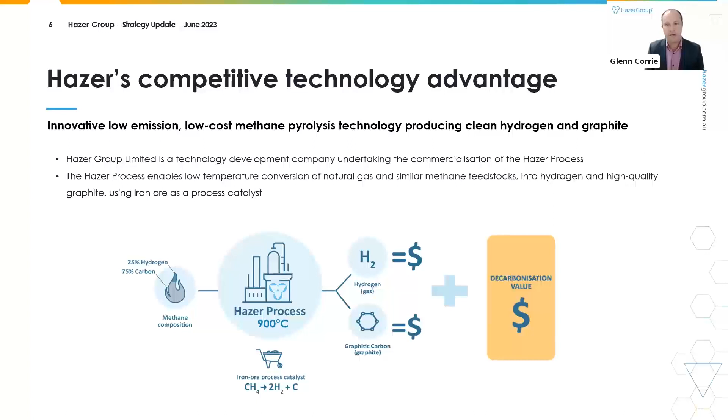Just to recap, Hazer is developing a low-cost, low-emissions methane pyrolysis technology that essentially takes natural gas and methane as a feedstock, which is 25 times more harmful than carbon dioxide. Using iron ore as a catalyst, we split it into pure and clean hydrogen and solid carbon in the form of graphite. The iron ore, which is cheap and abundant, is our competitive advantage for two reasons. Firstly, it significantly reduces the energy requirement of our process, resulting in much lower operating temperatures. Secondly, it enables the production of very high quality graphite. So we are essentially one technology that serves three very valuable markets: the hydrogen market, the graphite market, and the decarbonisation market. And it's the latter that is attracting quite significant attention and interest in our technology.

Corporately, our largest shareholder is AP Ventures. They are a leading global hydrogen investment growth capital fund, backed by some very sophisticated and notable investors, including Mitsubishi, Sumitomo, Equinor, Anglo American, as well as the Temasek Group in Singapore. It's very strong validation for us, our story and our technology, that we have a substantial holder from a very sophisticated investor. Other things to point out: we have an adjusted cash position of just shy of $18 million following the receipt of our R&D rebate cash refund, which significantly shores up our liquidity. It's worth mentioning as well that we have spent $70 million to date on developing the technology, which really just represents the scale of the investment we have made in developing and advancing the Hazer process.

We'd like to share a short video with you that highlights, we think, a very nice summary of our technology.

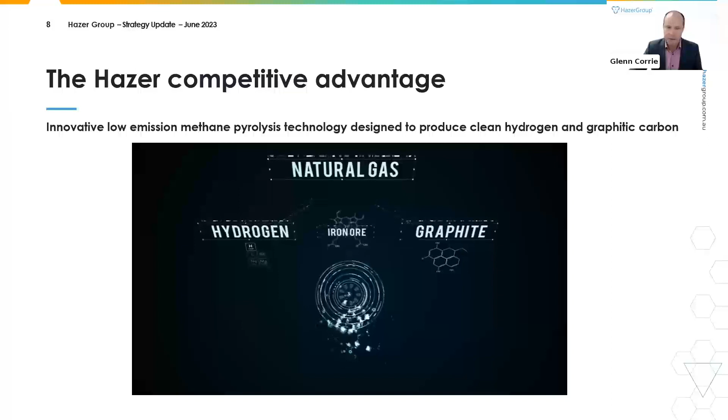Hazer, a low-emission, low-cost hydrogen and graphite production process. The Hazer process enables the effective conversion of natural gas into hydrogen and high-quality graphite using iron ore as a process catalyst. Welcome to the Hazer pilot plant, transforming today's commodities into clean energy and materials for tomorrow.

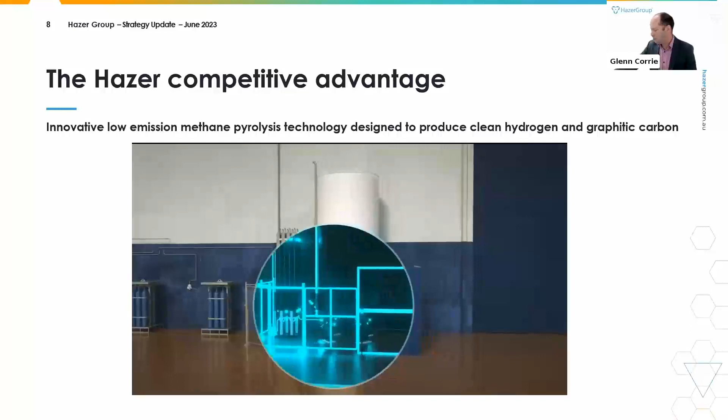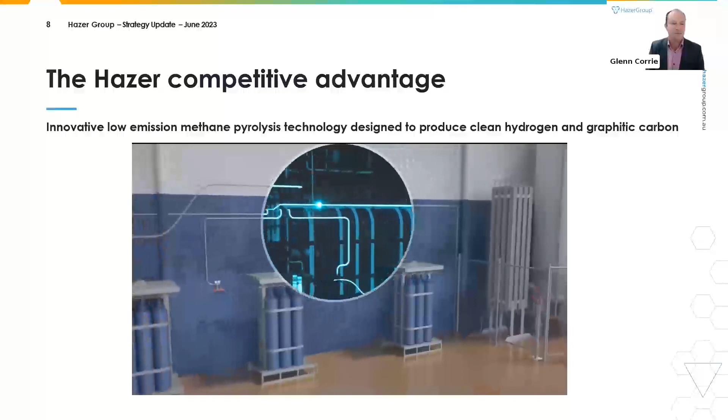The Hazer pilot plant uses natural gas as its primary feedstock. The gas is stored as LNG, which is regasified and fed through the main gas manifold before being taken to the reactor to commence the Hazer process.

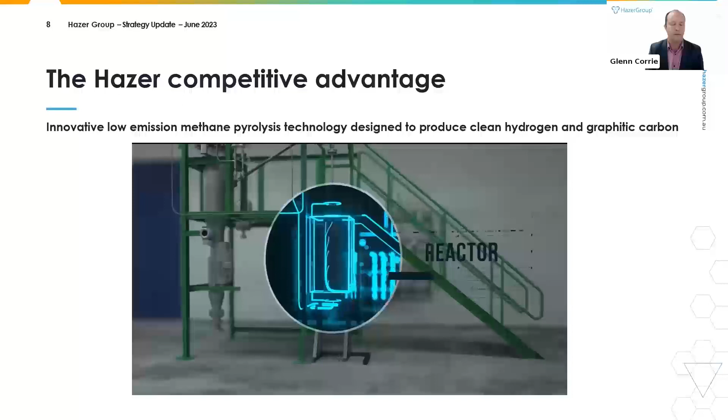The Hazer plant is based on a reactor called the fluidized bed reactor, where solids and gases can freely mix to enable the efficient conversion of natural gas into hydrogen and graphite. The reactor is heated to approximately 900 degrees Celsius.

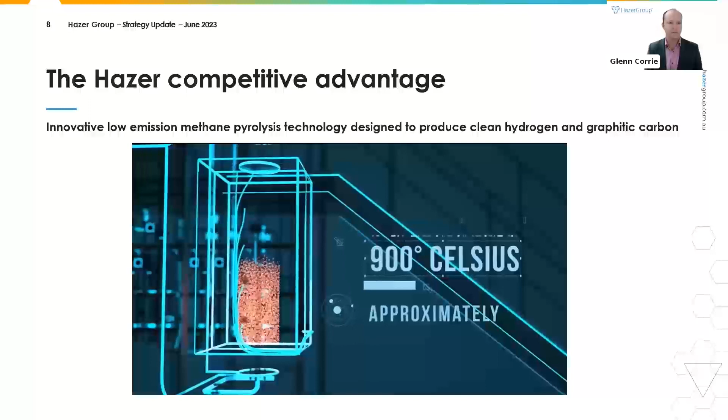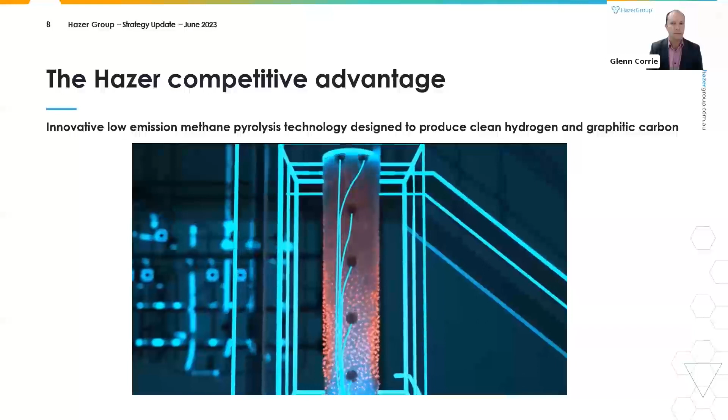The gas is forced through a distributor plate within the reactor. The velocity suspends the iron ore catalyst particles in the flow of gas. The catalyst is fluidized, suspended in the gas, and mixing the solid sand-like particles with the natural gas.

In this process, the methane molecules in the natural gas interact with the surface of the catalyst, decomposing into hydrogen and graphite. Under these conditions, the catalyst disintegrates into nanofragments, a process known as dusting.

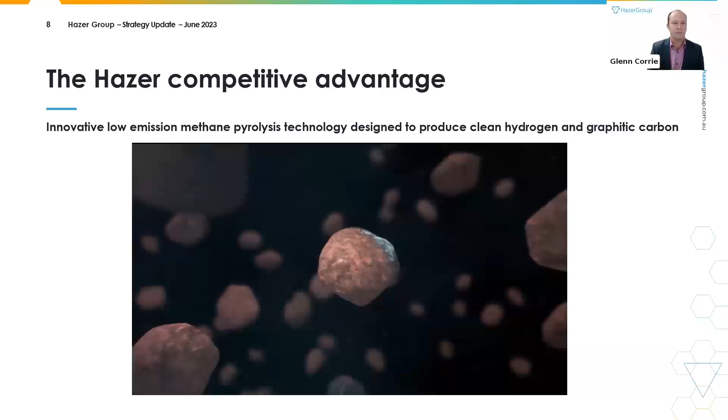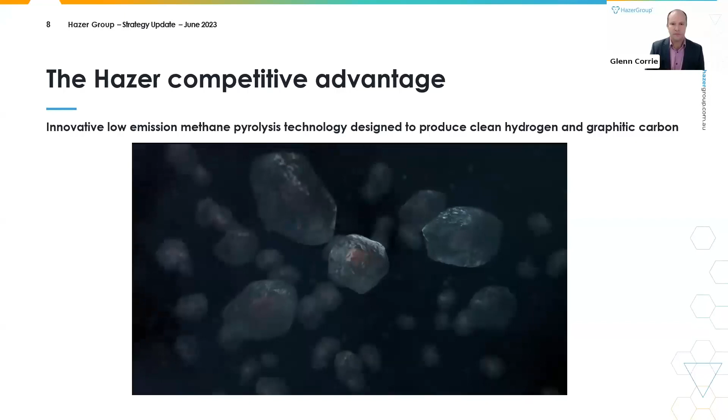The graphite is deposited on the surface of these tiny catalyst particles, while the hydrogen is released and mixes with the original natural gas feed. The graphite accumulates on the surface of the catalyst particle, reducing its density, which allows it to be liberated from the catalyst bed via the passing gas stream.

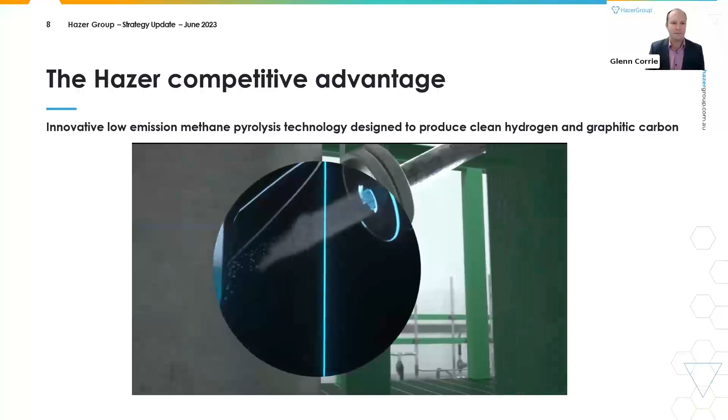The reactor expels a combination of gases, unreacted natural gas, and the hydrogen product, as well as the solid graphite particles. This stream is filtered with sintered metal plates, yielding high purity graphite with minor amounts of encapsulated catalyst.

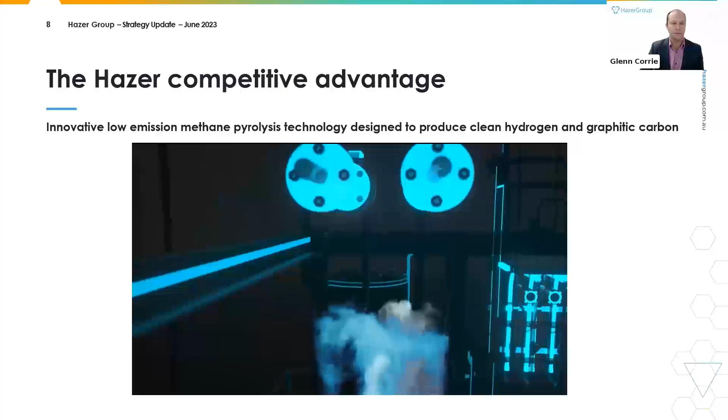After removing the solid graphite, the gas from the reactor can then be purified to remove the methane and any other byproducts, leaving pure hydrogen that can be used as an industrial chemical for clean energy applications, as a fuel for vehicles, or for power generation.

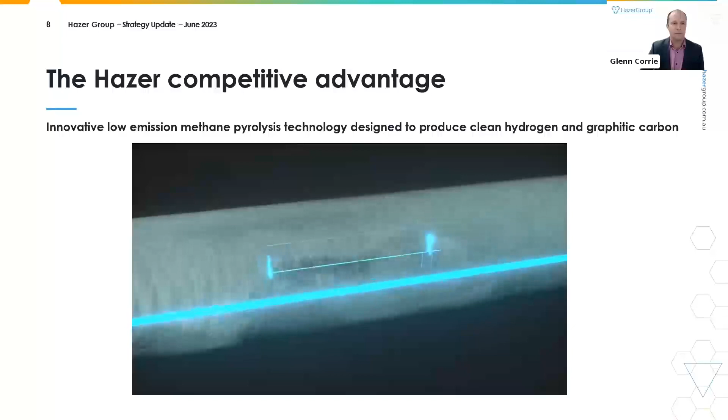The Hazer process has now created two new products: a raw 80 to 95% purity graphite product, and hydrogen. The gas has been transformed.

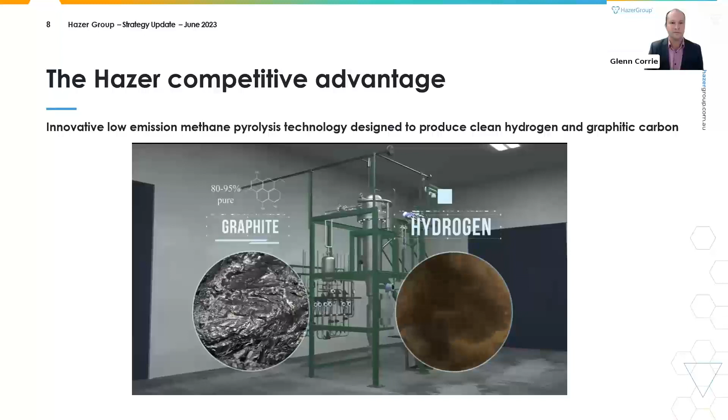In terms of strategy, we have spent the last 6 to 9 months developing what we think is a very robust strategy for the Hazer Group, really highlighting where we are today in terms of commercializing our business. I've often referred to Hazer as a double bottom line company, aiming to deliver sustainable financial returns for investors whilst having a very positive impact on climate change.

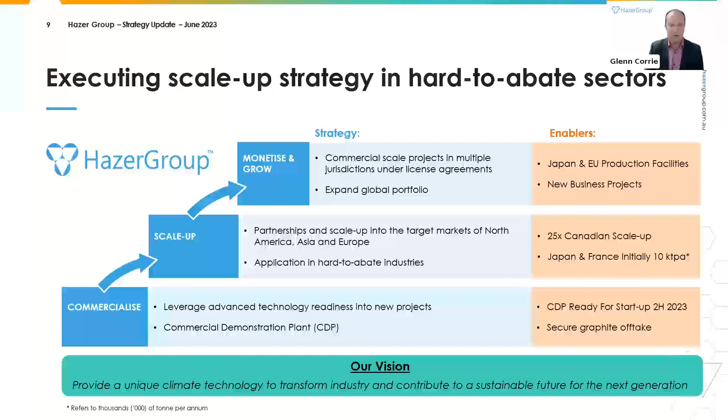We have 3 strategic pillars to our company. Firstly, commercialize, which is about leveraging our advanced technology and our CDP into new projects. Scale up, which is all about building partnerships with scale into our target markets, namely North America, Asia, and Europe. And thirdly, monetize and grow, which is about taking our commercial scale projects and developing a global portfolio under license agreements. Today's presentation from us is framed around these 3 pillars of our strategy.

It's just worth acknowledging very quickly, we align with the United Nations Sustainable Development Goals. The 3 most relevant SDGs to us are SDG 7, providing affordable and clean energy, SDG 9, industry, innovation and infrastructure, and importantly, SDG 13, climate action, where we are partnering with global corporations and governments in support of climate action.

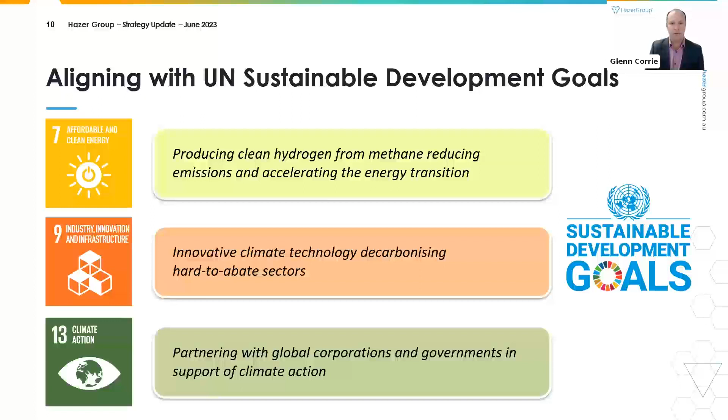Last one in this section, we have a very busy 12 to 18 months ahead. We've got a long list of positive milestones and catalysts. Today, again, we're reiterating our guidance that our CDP, our commercial demonstration plant, remains on track for a second half of this year startup.

We're making continued good progress on the procurement of the heat exchanger and the reactor materials, which Mark will talk to shortly. Secondly, we continue to drive forward our project in Canada with Suncor and Fortis, energy giants in North America. All of the engineering work around the reactor and the balance of plant is ongoing, and we are now working on definitive commercial agreements, which includes the license arrangements as well as offtake agreements for the hydrogen and the graphite streams. We're still targeting a final investment decision on that project by the end of this year.

New project-wise, you'll have seen we're very pleased to have announced 2 new projects this year, one in Japan and one in Europe with Engie, leading partners. These transactions, again, just demonstrate that we're executing strategy.

As Luke will elaborate, our pipeline is deep. We continue to work in our target markets of Asia, Europe, as well as North America. We continue to work very closely with Mitsui on our graphite and the marketing of our graphitic carbon. This is going very well. We're starting to see very strong interest in Hazer graphite from sectors actually that we didn't really anticipate. We'll share a little bit more about that today.

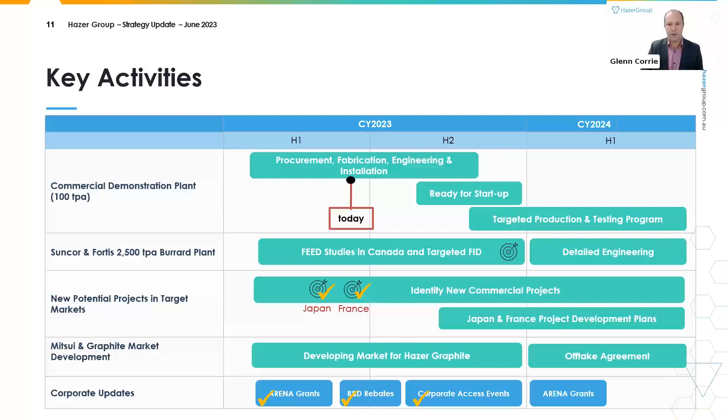Corporately, we continue to kick goals and get more runs on the board. We've achieved our ARENA milestone, accelerating $3 million of cash into the business, and we recently announced the receipt of $9.5 million in R&D cash rebate, which further shores up our liquidity, maintaining our robust and flexible financing position.

Moving on to our investment highlights, we've got 8 key highlights. Our investment case is really compelling. We're a disruptive, low cost, low emissions proprietary technology with a very strong competitive advantage.

One technology that serves 3 markets. Attractive returns and economics—we're on the lower end of the cost curve, very importantly, which is going to drive higher margins and larger cash flow generation as we start operating.

We've got a rapidly expanding global footprint with tier 1 partners in our strategic markets, decarbonizing hard to abate sectors.

Fourthly, we're an advanced technology. We've successfully scaled this up now 5 times, and we're now preparing our commercial demonstration plant for first production this year. Number 5, we've got a clear commercial pathway.

We are CapEx light. What that means is we will enable early free cash flow as a licensor of our technology, eliminating the requirement for large licks of capital as we develop our technology and grow it into global locations.

Number 6, as I've mentioned on the graphite side, we're unlocking the value for our graphite, which diversifies our earnings over 2 products, hydrogen and graphite.

We've got the strong tailwinds of the energy transition, and we're right in the sweet spot. The market is large, as we'll demonstrate this morning. It's valuable, and it's growing at pace. We're also excited by the fact that we have strong government and policy support for hydrogen in a lot of our focus and target markets.

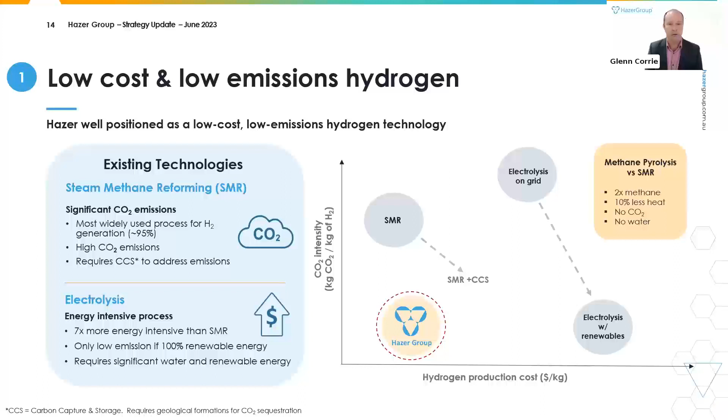We've got strong IP protection. We've been at this 15 years in terms of developing our technology and putting IP behind it and securing our patents. We have secured key patents in multiple jurisdictions around the world. We've got 4 IP families: focused on the iron ore catalyst, focused secondly on the morphology and purification of our graphite, improvements in our top technology around the reactor in particular, as well as our trademarks. Today we've secured over 70% of our IP, our intellectual property, in 30 jurisdictions around the world.

We continue to receive approvals for patents and grants continuously. Today, I'll say we've never been challenged on IP, and every application that we have made for a patent, we have received. Generally speaking, if we receive one in the US and in Europe, generally we find the rest of the world follows in that respect.

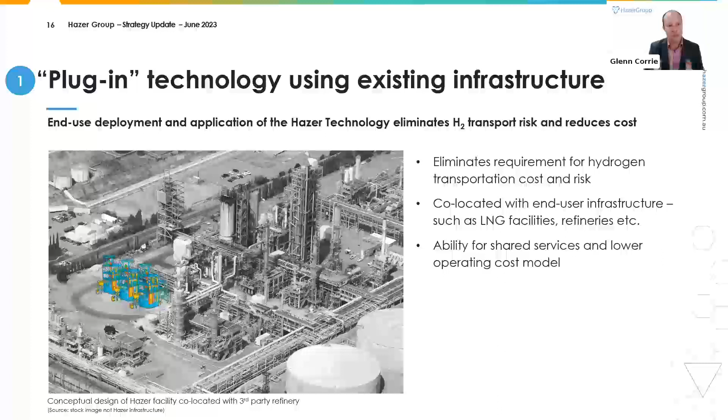Advantageously, Hazer is a plug-in technology, and this will come up as a theme throughout the presentation. We are co-located with and integrated with end user infrastructure, such as refineries, as you can see in the picture on the left, a petrochemical plant, and this eliminates the requirement for shipping ammonia or liquefied hydrogen, both of which are unavailable to deliver hydrogen today.

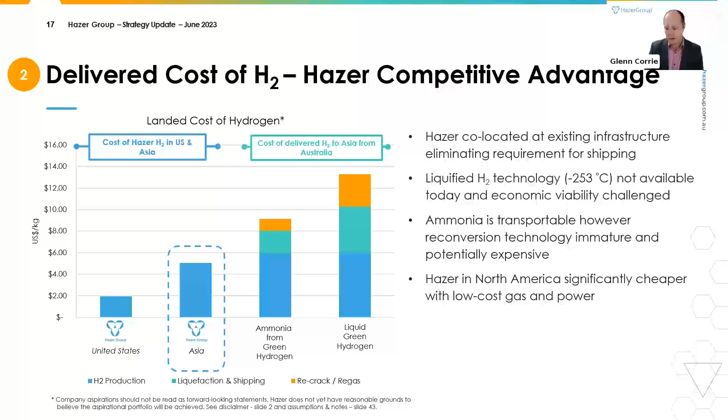We've already scaled this technology up 5 times, so we're very well advanced. Our technology readiness is quite high on the scale already. In fact, as we've scaled up, we've benefited from not just the larger scale, but also the economies of scale and getting access to equipment and materials. So the technology has actually enjoyed being larger for us to scale up. And our focus at the moment is clearly on delivering the commercial demonstration plant, and behind that, then delivering the key projects in Japan, in Europe, and in North America that we've got in the pipeline.

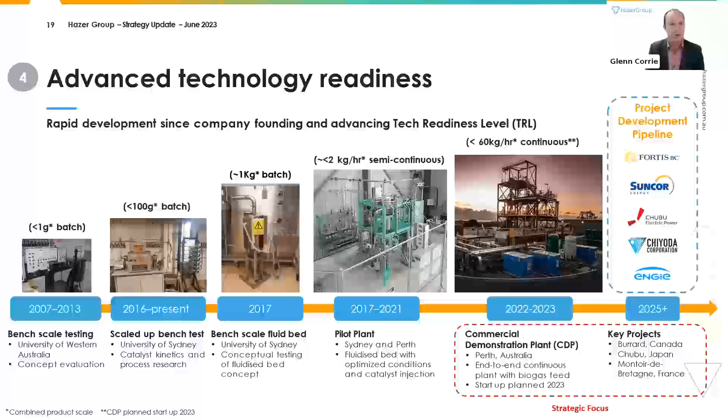We've got an active R&D program at the moment. It's the core of our business, and it's one of our competitive advantages. We've got 3 main areas that we're focusing on: the process development, essentially how we scale up this technology and how we scale up our reactor to 10,000 tons per annum, 20,000 tons, and even larger as our customers demand. Secondly, we're unlocking the value of our graphite. It's a very versatile product, and we're currently identifying suitable high-value, high-volume markets and other potential offtake opportunities. And thirdly, on catalyst, iron ore, as I've mentioned, is a competitive advantage. It's cheap, yes, it's abundant, and it also enables that low-cost, low-temperature reaction to occur. That drives our low-cost model.

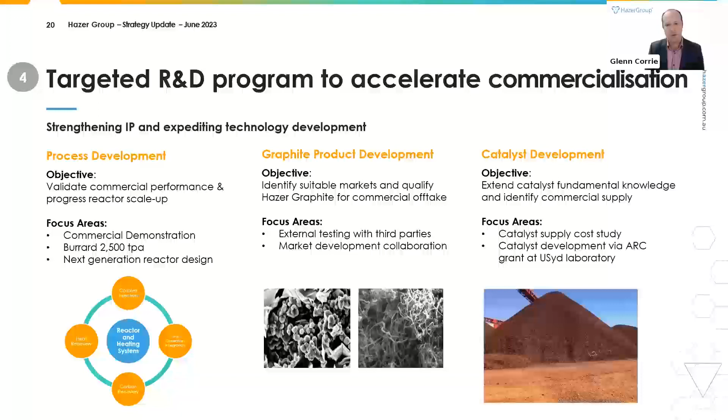How we source catalyst, process it, and transport it will continue to drive operating expenditure, and we see improvements to further drive this down. We've got a CapEx-light business model, very important. We leverage the strengths as a technology provider and licensor of the technology. This has the advantage of unlocking early free cash flow by avoiding large-scale capital exposure, enabling the delivery of cash flow from day one once we're operating. We'll achieve this through strong partnerships at the engineering level and the EPC level with groups such as Chiyoda, Suncor, Wood, Hatch, and others that are supporting our technology and our business.

We've developed a revenue model that consists of a combination of license fees and royalties. It's fairly common for technologies. License fees will be linked to plant size, and royalties will be a percentage of our revenue or revenue from product streams.

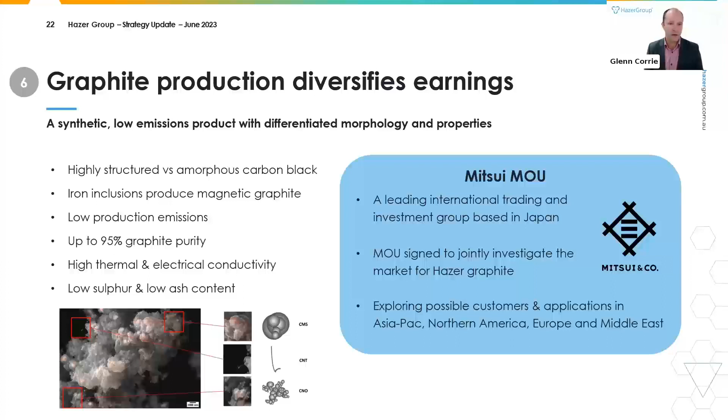As I've mentioned a few times already, our graphite is versatile, it's potentially very valuable, and has very unique properties. It's high quality, up to 95% purity. It's importantly low emissions, and that's very attractive to certain customers. Last year, you will have seen in December, we joined forces with Mitsui under an MOU to explore the markets for our Hazer graphite, and this really helps to support and validate the potential value of this product. The earlier results that we've seen from that work has been very encouraging. We're starting to see wide-ranging interest from potential customers across a broad-ranging and diverse range of applications: steelmaking, water purification, lithium-ion battery technology, thermal energy storage, asphalt, concrete, just to name a few.

In particular, we're getting quite strong interest from the steelmaking sector as a potential broad-ranging application for a replacement, as an example, a replacement of coking coal in the blast furnace, and also a recarburiser in the electric arc furnace. So there's some really emerging markets for the graphite.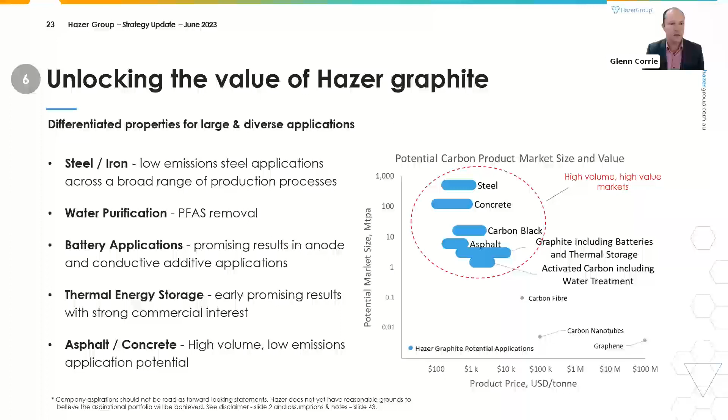If you look at the chart on the right, it will give you a little bit of context in terms of the potential TAM, or market size, for our graphite. It could be as large as over 700 million tons per annum in terms of size or scale of market, with price ranges exceeding over $1,000 a ton. So something we're obviously very keen to materialize over the coming months and years ahead.

Here's a snapshot of the hydrogen market. Climate change, of course, is a problem. Hydrogen will be a key pillar to the solution. We're confident of that - it's a question of how big it's going to be. Most research out there suggests it's going to be growing in the order of 5 times by 2050 with the rise of the hydrogen economy.

Goldman Sachs has estimated that it's going to take about $5 trillion of investment required in the supply chain to get to where it needs to be by 2050. Today's market on the left-hand side is almost 100 million tons per annum. To put that in context, the global LNG market is about 350 to 400 million tons. So this is already a quarter of the global LNG market. So it's large and it's very valuable. It's valued at around 170 to 175 billion dollars in 2022. So it's a significant market.

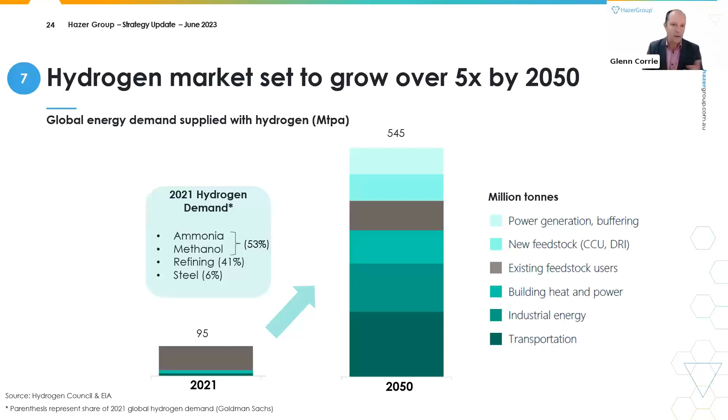All of that 95 to 100 million tons of hydrogen is produced by steam methane reforming, as I mentioned earlier. That gives rise to significant CO2 emissions, and that's Hazer's immediately addressable market today as a disruption to steam methane reforming as a technology. We'll see this grow into 2050. We expect to see significant growth in hard-to-abate industrial sectors. We're being approached by companies and corporations operating in these industries looking for decarbonisation solutions to steel making, cement making, power generation, and mobility.

In our markets, we are seeing a strengthening support on fiscal policy and financial support to hydrogen technology and clean hydrogen. We are witnessing a clear shift from ambition to policy action. Just to call out a few: in Australia, the Australian government has just announced the Hydrogen Head Start program, which has committed $2 billion to industry. In addition to that, we've been the beneficiary of an ARENA grant up to $9 million, as well as $9.5 million in terms of our R&D tax refund.

So great support here. In Canada, a little bit the same - we've received a grant for our Canadian project of $8 million to start with, which is great. And we expect further provincial and federal funding as we approach FID on that front. And I will also call out the US here.

The United States has the Inflation Reduction Act, which is recently announced. It's very attractive supply side support, offering up to a 10-year tax credit worth up to $3 a kilogram for hydrogen. Now, we may not need all of that as a low cost, low emissions supplier, but it is potentially available for us when we start operating in the US. The recent Australia-US Climate Compact, we think, will help facilitate access to this indirectly or even directly. So we're excited about the potential of the North American market.

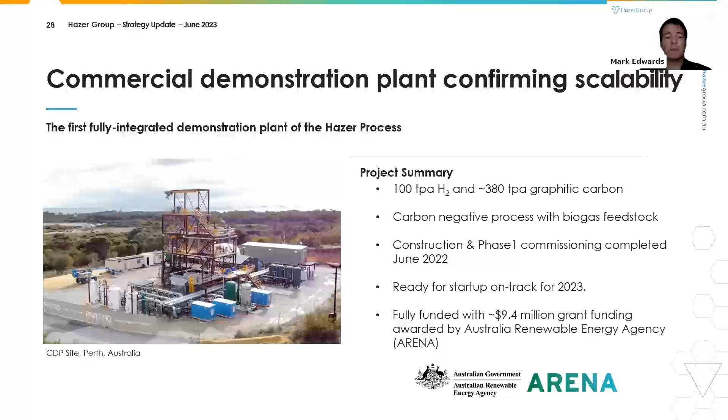The project takes waste biogas from the otherwise flared gas at Water Corporation's waste treatment plant and turns it into hydrogen and graphite. It's viewed as a very positive project, both in the local community and industry and government, demonstrated by government support, with ARENA awarding one of its largest grants of $9.4 million to support the project.

The current status of the CDP is we're in the final steps to bring it online. From the diagram, you can see there's only a small amount of equipment to install, most of which we already have on site. The remaining equipment we're waiting for is the 2 hot heat exchangers, for which we've already received all the specialist materials, and fabrication has commenced.

The last item is the Mark I reactor, which has already passed the critical milestone of materials forging and heat treatment. It's actually just in its final machining stages, and that's expected to be shipped to Australia in a couple of weeks, where we'll finish the fabrication and assembly.

We've started construction on site to get an early start on the furnace and the heat exchanger and supporting electrics. Once those last 3 remaining items arrive, we're confident to have all the plant and equipment installed by around the end of Q3. That gives us a comfortable amount of time to complete the commissioning process and achieve hot operations, RFSU, in the second half of this year.

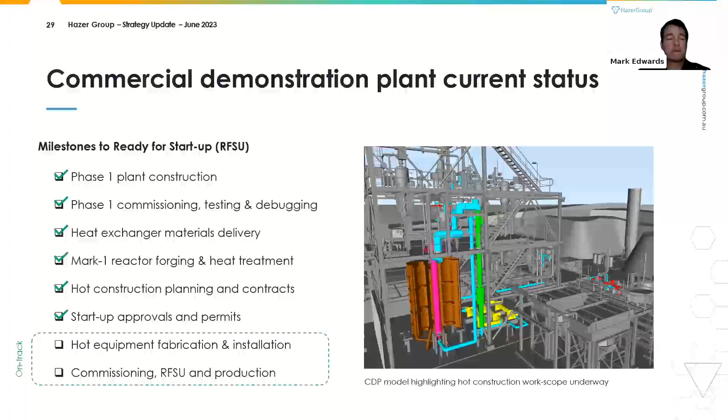Luc will now update us on the project pipeline.

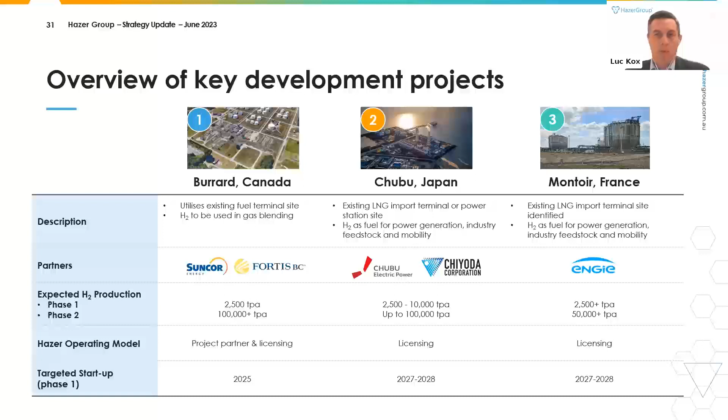In the next couple of slides, I'd like to take you through some detail on the recently announced deals, as Glenn alluded to before, as well as Canada, which has been more widely published already. So on this slide, you see 3 projects: Burrard in Canada, a project in Chubu, Japan, and Montoir in France. It's relevant to note that in the next couple of slides, I will focus on phase 1 of these partnerships. There is a very real potential for phase 2 projects, which are much larger capacities in the future.

In Canada, as mentioned by Glenn already, we're working with energy giants Suncor Inc. and Fortis BC for a 2,500 tons per annum Hazer facility located at the existing Burrard terminal, which is owned by Suncor. The use case there will be gas blending into the gas distribution network, so the hydrogen will go into the natural gas reticulation system. That's also determined the scale of this project, the capacity to remain under the safe thresholds for this gas blending.

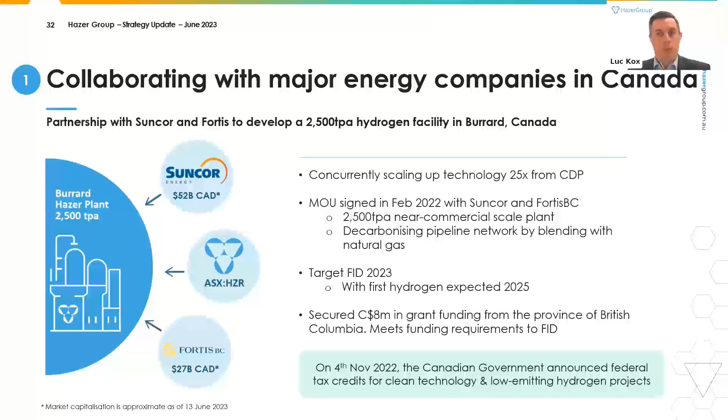We decided to go for this capacity together with our partners. Important to note that the BC regulator, British Columbia, has also approved this blending as a use case in that part of the world, so an important milestone for the project. The project, as Glenn mentioned, has already received 8 million Canadian dollars from the British Columbia provincial government, which covers the activities up to the FID decision, targeted for late 2023. The ultimate goal of this collaboration is a much larger facility at an existing refinery.

Next one is Japan. This project is a tangible outcome of a relationship between Hazer and Chiyoda Corporation. Chiyoda is a global provider of EPC services with a very strong track record in the engineering of complex infrastructure such as LNG facilities, refineries, power stations across the world.

We've been focusing with them on Japan, and we've now teamed up with Chubu Electric. For those not familiar, Chubu Electric is the 3rd largest gas to electricity utility in Japan, providing energy, electricity and gas, to an area with a population of 23 million people in central Japan, including industry. To provide all that electricity and gas, Chubu Electric consumes on an annual basis 12 to 15 million tons of LNG. This is also exactly the reason why they wanted to work with us, because Chubu Electric has told us that they need to decarbonize.

They've signed up to net zero by 2050. To meet those objectives, they have concerns around the pace and the availability of supply chains for hydrogen for import-export. As Glenn alluded to before, they're not going fast enough to enable Chubu Electric to meet its objectives. So they want to work with Hazer to maximize the use of their existing energy supply chains, LNG, the feedstock for the Hazer plant, and also their existing infrastructure, the regasification terminals and power stations they have available at present.

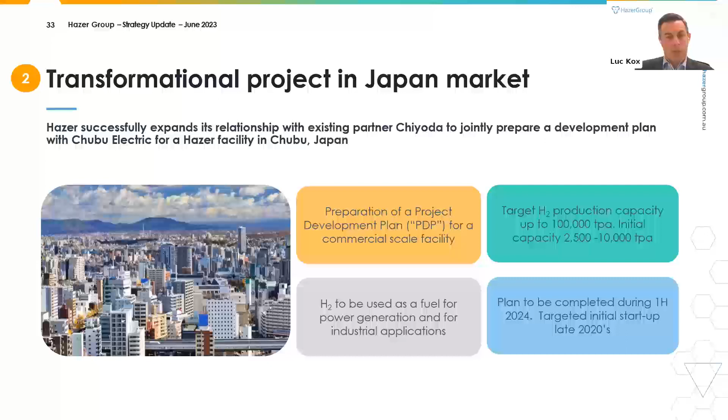Last one out of the three is the first project in the EU, also the most recently announced one. This project is a result of a collaboration with ENGIE, the French multi-utility company based in Paris. Over the course of 2022, ENGIE, with input from Hazer, conducted a pre-feasibility study for an initial Hazer plant in France. In addition to the technical aspects covered under this PFS, one important outcome was that preliminary investigations confirmed a Hazer facility would be able to meet the EU taxonomy regulation for low carbon hydrogen. So that's a really important milestone for that project, and also for us as a technology, to confirm that we can meet those EU regulations for low carbon hydrogen.

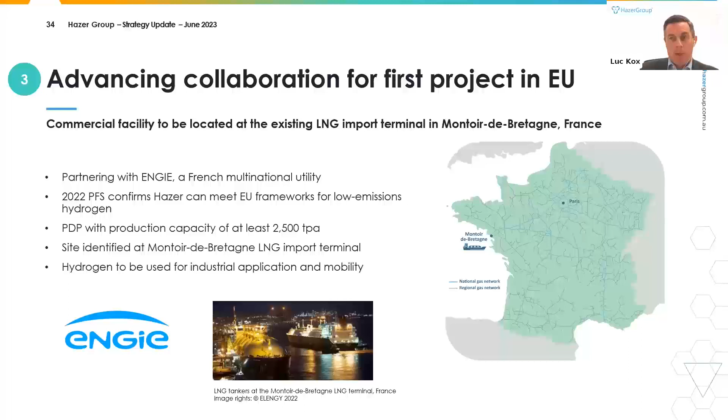And on that point, I'll now hand over to Neil, who will talk about the monetization and growth of the company. Good morning. Thanks, Luc.

Thanks, everyone. Looking forward to talking to you today about the growth and monetization part, the third pillar of our strategy. This slide recaps some of the items that Glenn covered previously, but basically the key points to note here are that the total addressable market for Hazer is an existing market. It's a significant sized market, as he touched on, of the same value approximately as LNG, although a quarter of the volume, so a high value product.

The SMR that we're looking to seek to replace or displace is a market now. It's CO2 intensive. Hazer will look through their processes to improve that position, and we can address that through lower emission outcomes and products. The SMR in countries like the target markets Luc has alluded to in Asia, they don't have the capability to do carbon capture and storage in those locations, which is another competitive advantage that Hazer's product has over that existing addressable market. The first mover advantage is also available to us because we're a technology that's ready now, as we've seen in the earlier presentation and as Mark alluded to with CDP.

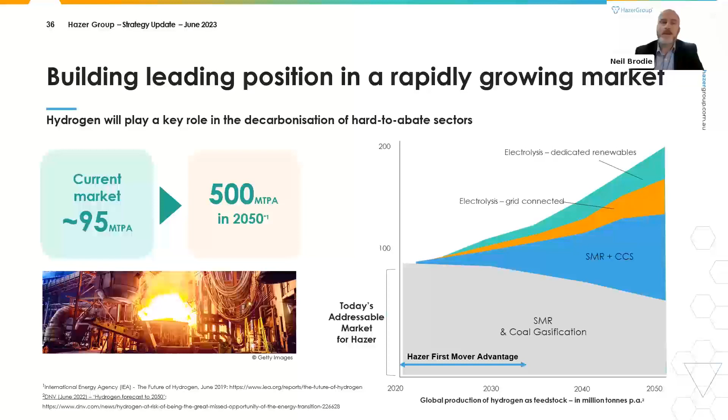This slide shows the illustrative plant economics that we put together to show our audiences what a plant would look like at 50,000 tons per annum of hydrogen production. And as Luc alluded to, those are the sizes being considered by already existing customers and partners that we have. The NPV is very attractive at 20 years, at roughly 400 million Australian. Project IRR of 24% ungeared, and a return on investment of 4 times for a plant of this size, should we build these with some of those partners we talked about earlier.

The important part to notice here is that we've been careful with our economics, and what we're showing is any cost before we optimize for gearing, so IRR could be improved with some work with debt, for example. This doesn't include any non-repayable government grants or fundings that are likely to be enjoyed, as we saw in prior slides, and it also does not include the carbon tax offset that the plant owner could benefit from as policy and government regulations progress and mature.

As Glenn alluded to earlier, the Hazer returns of a plant of this size - we are a CapEx light model. We're not investing in the capital at the front end of these plants, and therefore that enables the early cash flow. The NPV that we would enjoy as the technology provider is from license fees and royalties, and that would be roughly 97 million Australian under a plant of this size and scale.

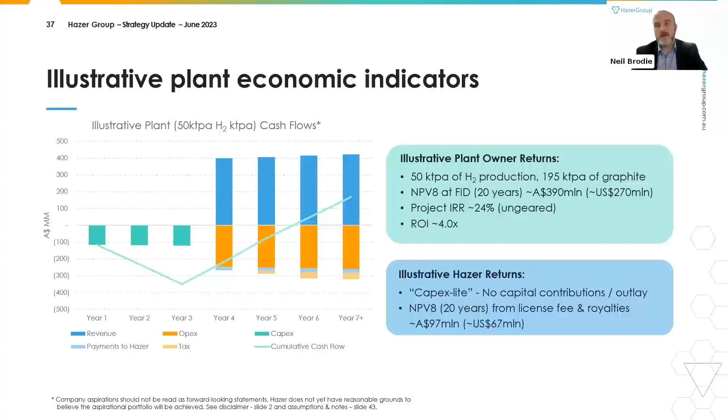Looking at our growth ambition, as we've heard from Luc already this morning, we've already enabled 3 projects, 2 of which MOUs were announced in only the last 3 months. So we're confident in our growth ambition that we can get to 10 plants in 10 years, following this strategic model we've just described. Part of that, as Luc has already touched on, was to do with the significant demand pool we're already getting from industry - they're looking to work with us across various industry segments to decarbonize their businesses.

That's the growth and monetization part. So I'll hand over to - one more slide, beg your pardon.

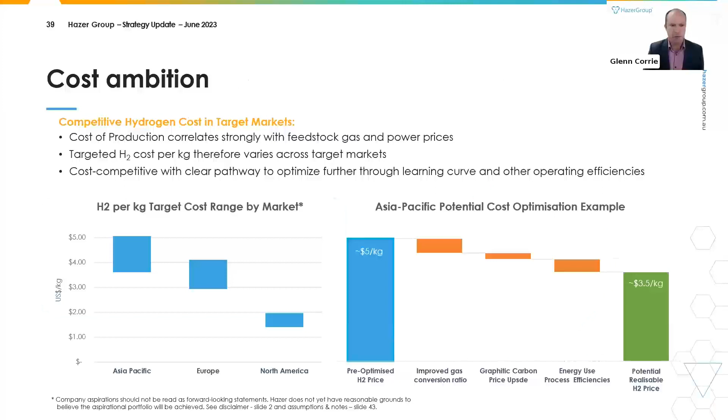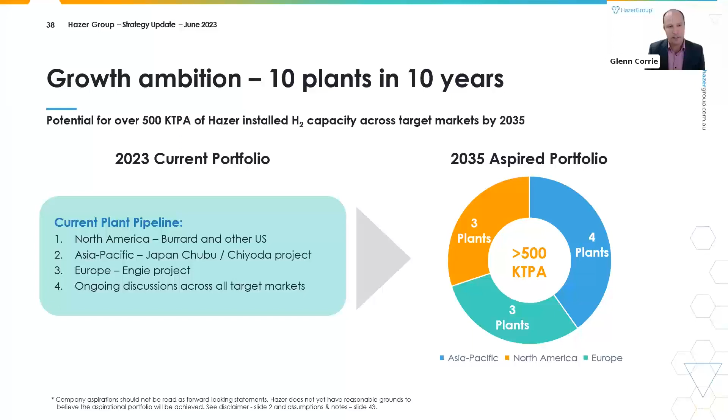If I may just go back, because I think it's worthwhile pointing out on this slide, our ambition, of course, is 10 plants in 10 years. If you put that 500,000 tons per annum into context, as we've spoken about, today's market for hydrogen is 100 million tons - so that's less than 1%, in fact it's 0.5% of today's market. As Neil said, that feels achievable, feels realistic. And if every one of those plants can deliver near on $100 million of NPV for Hazer, then we can see ourselves being a fairly significant company in the near term.

I may just wrap up before we open up the lines for Q&A. Look, we are a compelling investment case. We're an advanced technology with strong competitive advantage - one technology, 3 diversified markets: hydrogen, graphite, and decarbonization. We're co-located with existing infrastructure, enabling a shorter pathway for customers to realize CO2 emission reductions in hard-to-abate sectors. We've got a very clear pathway now to commercialization, 3 projects already in the bag, and an ambition to get to 10 in 10 years. We've got a CapEx light model that eliminates our need for large capital requirements, unlocking early free cash flow and attractive returns. We continue to build on our global partnerships across our strategic markets with tier 1 partners that believe in the technology and are looking for a decarbonization solution. And of course, we're in the sweet spot of the energy transition and the rapidly growing hydrogen market.